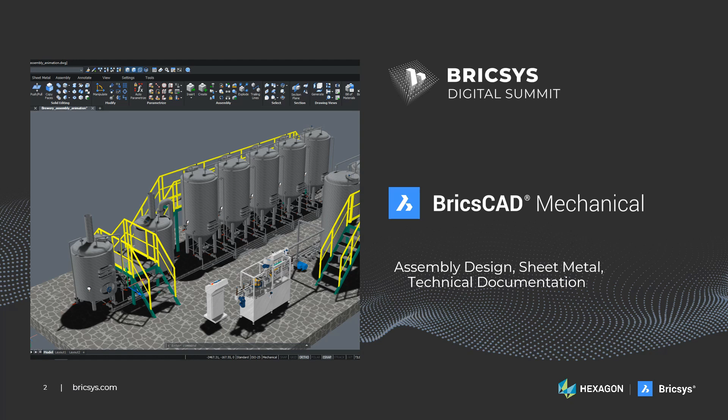If you did not hear about BricsCAD Mechanical before, then you probably consider it as just another toolset to create 2D mechanical drawings. While 2D drafting is perfectly possible with BricsCAD, we at Bricsys strongly believe in 3D. Three-dimensional modeling allows designers to fix errors at early design stages, analyze different aspects of design products, generate NC code and technical documentation. While BricsCAD Mechanical is not a toolset for 2D drafting, it is also not just another mainstream 3D mechanical CAD. There are serious differences of BricsCAD from other MCAD software.

First of all, with BricsCAD, you don't need to spend your time and money to study a completely new software with its own GUI and design principles.

With BricsCAD, you always remain in the same familiar environment, which was extended with few intuitive tools. Secondly, with BricsCAD Mechanical, you will be more productive in design thanks to our unique technology of 3D parametric components and hundreds of vertical applications from our partners. You can easily implement your own tool or application using our Lisp or BRX API.

Third, BricsCAD does not pretend to replace your current CAD system. It is ready to collaborate in multi-CAD environment. You can continue to use your different CAD tools, but with BricsCAD, you will never have headache with file formats, which lose design intent in translation. I believe no other CAD system in the world has so powerful tool set to rework imported geometry using a combination of direct editing operations with automatic history-free parameterization.

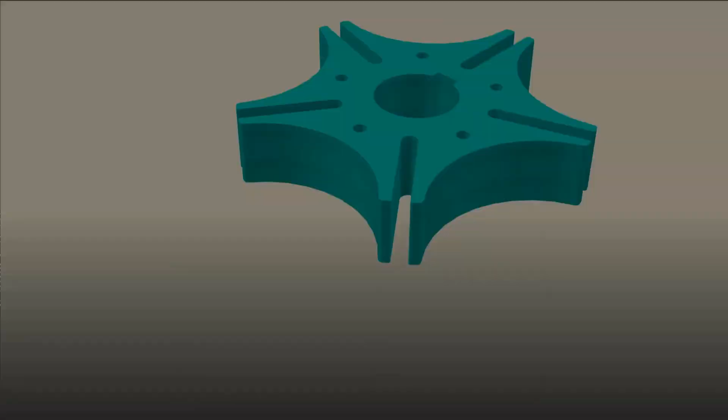Each year, our quality assurance engineers test new functions of BricsCAD Mechanical on a completely new model. This year, we were inspired by the idea of Maltese cross mechanism. This is a gear mechanism that translates a continuous rotation of the driving wheel to an intermittent rotation of the driven wheel. It was modeled in BricsCAD using 3D constraints and expressions.

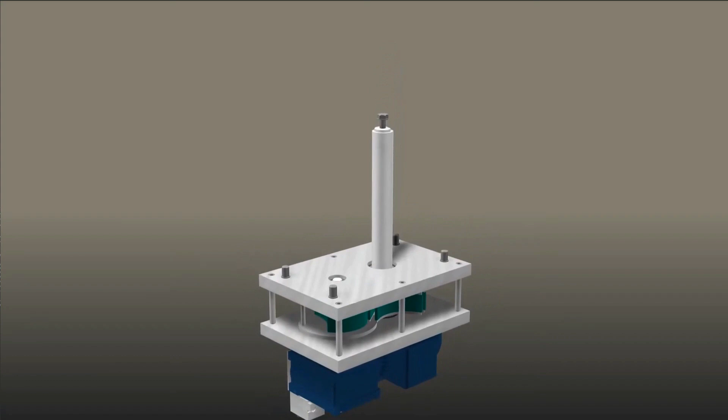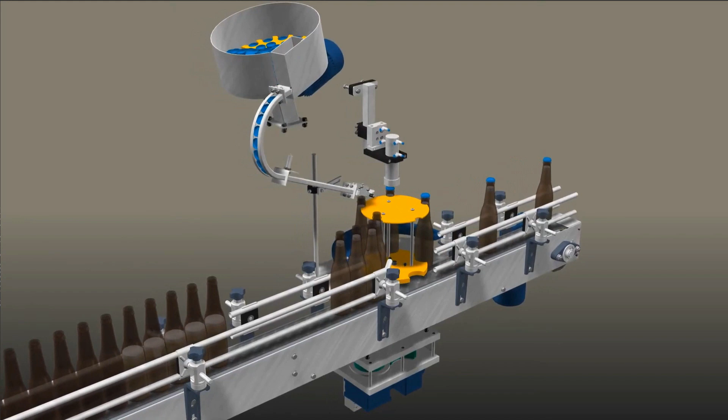And this movie was recorded in BricsCAD using Animation Editor, which allows you to create complex scenarios of 3D parametric animations with different effects, including appearance or disappearance of particular parts, kinematic simulation, and camera movement. As you can see, this Maltese cross mechanism is a sub-assembly of the filling and capping machine.

Through a conveyor, the bottles are moved under some filling valves that inject the liquid into them. After the filling, the bottles move up to the other side of the machine where a cap is provided for each of them. This model also has parameters, which allows to adapt it to bottles of different size. It is a large assembly which consists of more than 3,000 parts, of which 500 parts are unique.

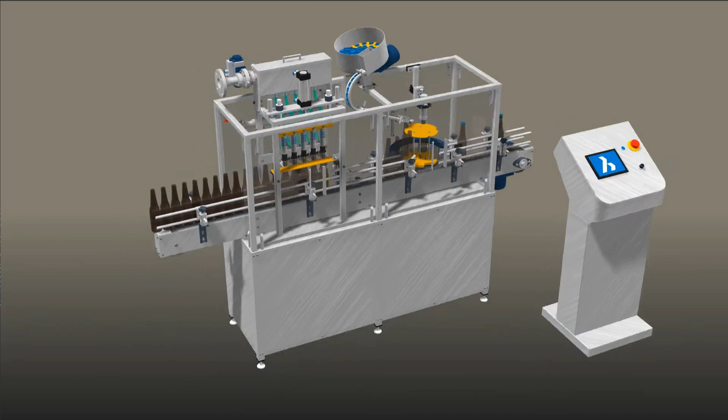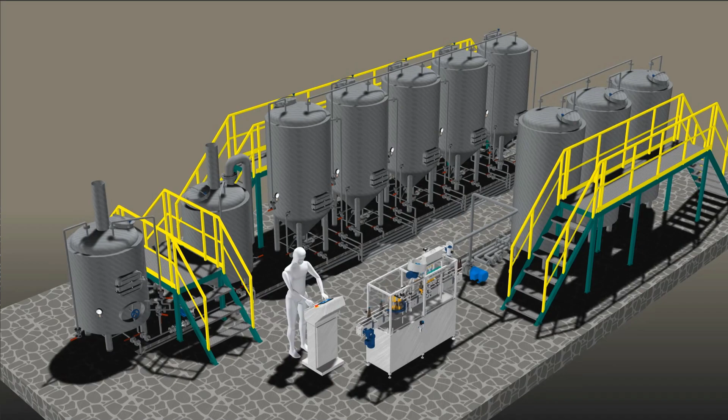And this machine is part of a brewery which also has a lot of vessels connected with pipes to a water supply and the machine. A number of standard parts are used here, which is also typical for many other industrial assemblies. This complex model was designed in BricsCAD Mechanical from scratch using new and improved tools available in version 21.

This year, we implemented the most popular suggestions of our customers and partners and extended the main tool sets, which are sheet metal design, assembly design, and technical documentation with the most requested tools. Let's take a look at these new features with the help of this brewery model. There are a significant number of very useful new features in sheet metal this year. Let us take a look at the most powerful of them using two sub-assemblies of the capping machine.

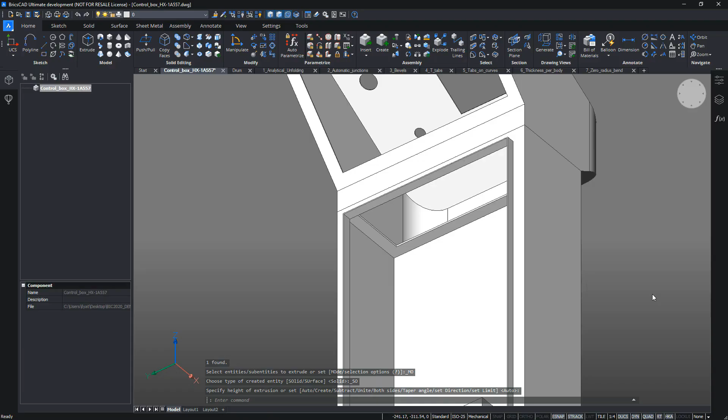In order to demonstrate the new intelligent way to create sheet metal parts from simple solids, we will be using this control box. Let's convert them to sheet metal, and now for the bottom part, you can see that on clicking on the top face, bends, junctions and reliefs are created automatically at the same time.

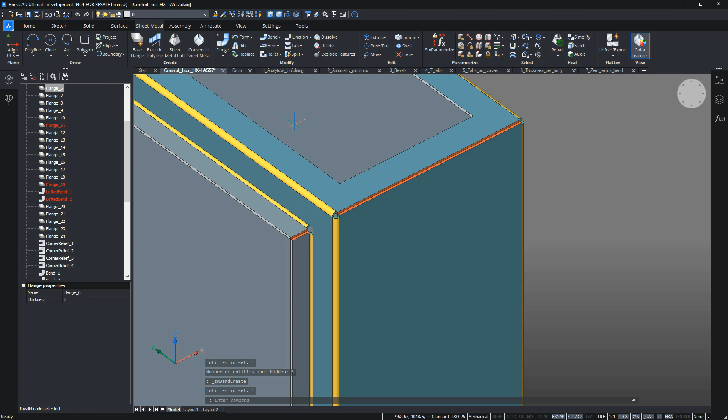That's really wonderful. For the middle part, we just click on two faces, the back and the front, and everything is being automatically created. We just have to choose the kind of miter, which is very fast using the amazing propagate capability that looks for similar geometries and automatically applies the miter. In a matter of seconds it is done and we can unfold the model. That is really amazing. Let's go now to the top part.

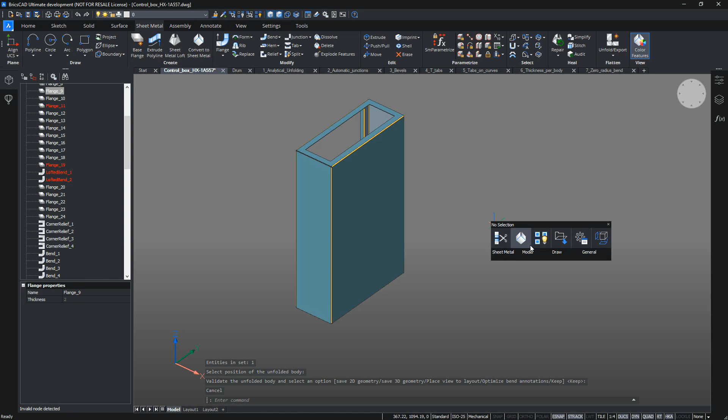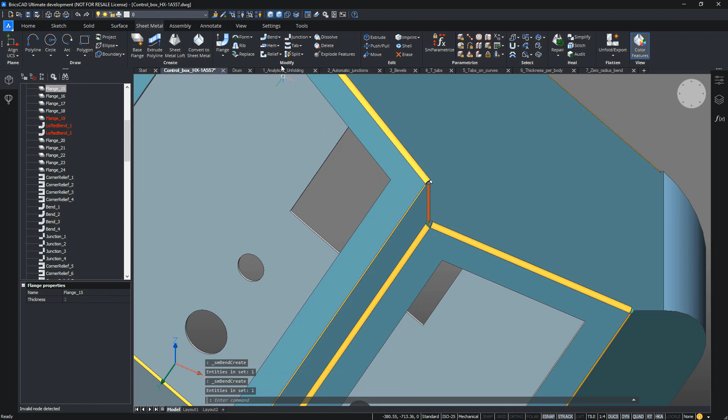First we create the bends on the top face. You can see that the related junctions are automatically being created here. Then we repeat this on the two back faces. Everything is created automatically except for the miters, which again can be placed using the propagate capability, and it's just a matter of a single click.

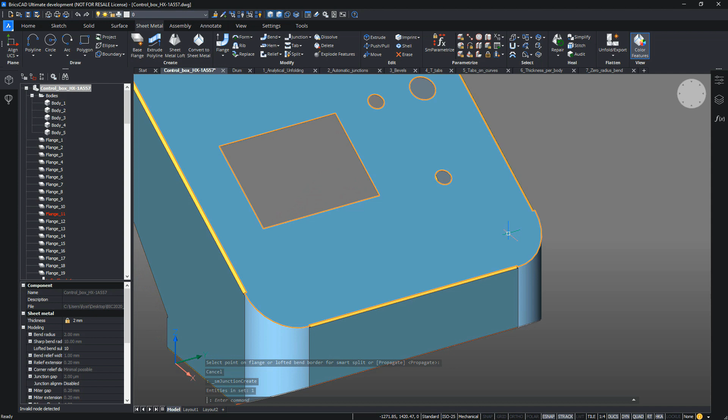Now let's try creating the curved junctions on the bottom and on the top curved edges. We will be creating the junctions here. This looks really easy. We still need to make some minor changes to unfold this part. Thanks to the possibility to switch bends and junctions, we will be swapping the bends with the junctions on the two sides. Now we will be able to unfold the part.

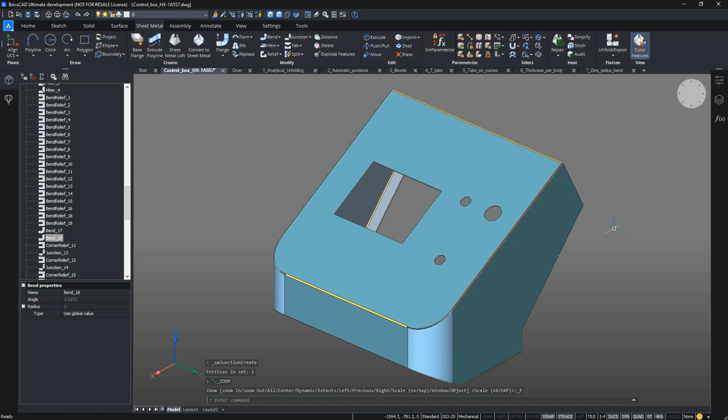Another important new capability is the possibility to assign one body with its specific properties, despite the fact that we had converted all the parts together. Here we are going to change the thickness of the bottom part. And you can see here the thickness is updated for the bottom part alone, and the rest of the components retain the original thickness.

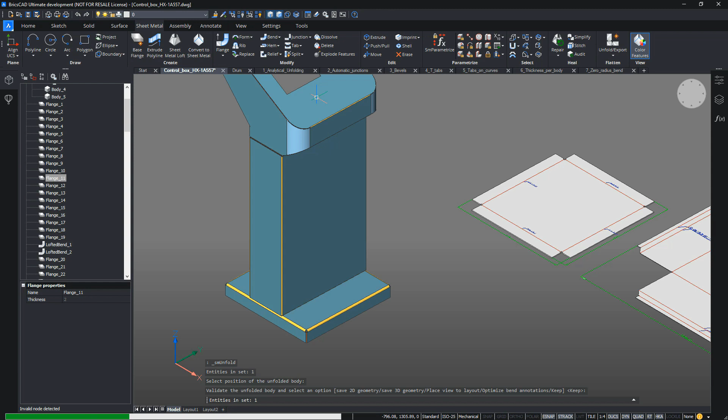And now we will go ahead and unfold all the parts. You can realize that in less than 4 minutes we have converted the three solids into sheet metal, and we have also unfolded them. That is really amazing here.

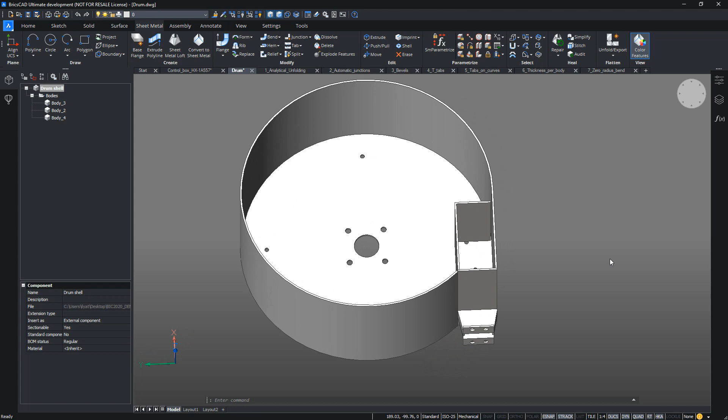Next we will be using this drum feeder that distributes the caps that will be crimped on bottles to showcase some advanced features in sheet metal. We start from the shell state, what we call poor sheet metal in BricsCAD language. First we convert them to sheet metal.

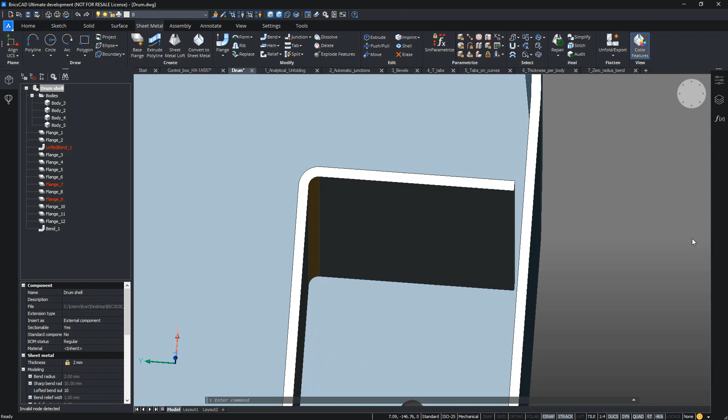Now we are going to add the bend to this small part that you see here. But you see there is a gap at the flange end. Now we will be filling this gap using the sheet metal junction. Then with our new T-tabs function, we can switch this junction to tabs and slots inside the flange, and not only at the corner. Look at this result here, that's really amazing.

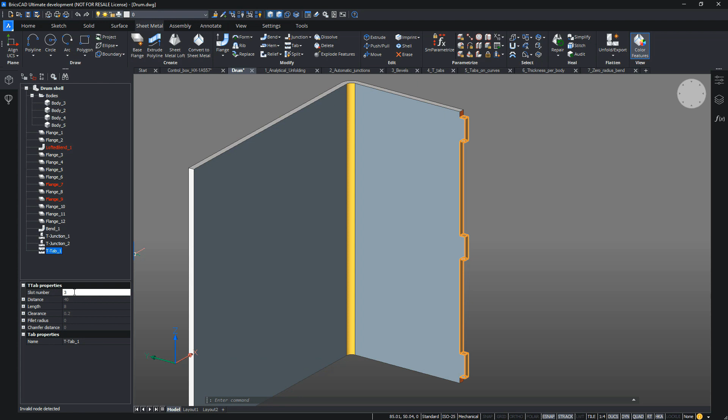But this is editable. We can change any parameter. For example, we can change the number of tabs to 2, and it is going to still retain the symmetrical feature. Now we will add two small flanges to guarantee the perpendicularity, and let's try to fix the width to maintain the design intent.

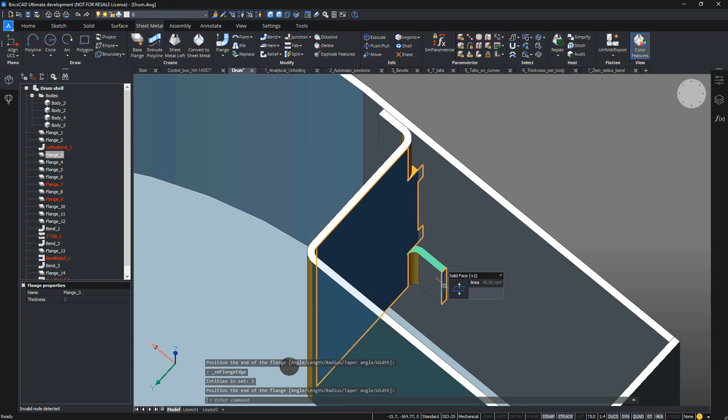Let us see how the tabs are going to behave when we try to move them by moving the flange using the push-pull command. The tabs and slots are going to move accordingly, and the design intent is being maintained. Even when we try to rotate the flange, the tabs and slots are going to move correctly.

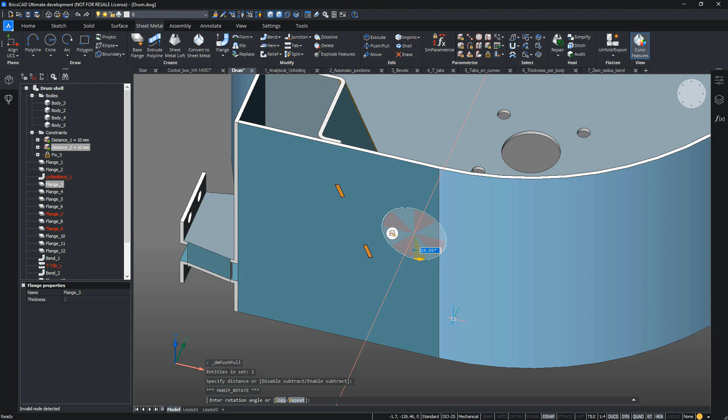Then thanks to the new capability of BricsCAD 21, we can change the thickness of this part, and you can see that the tabs and slots are actually changed, and the design intent is also respected. And you can see there is no collision here. And of course, we can unfold this as well.

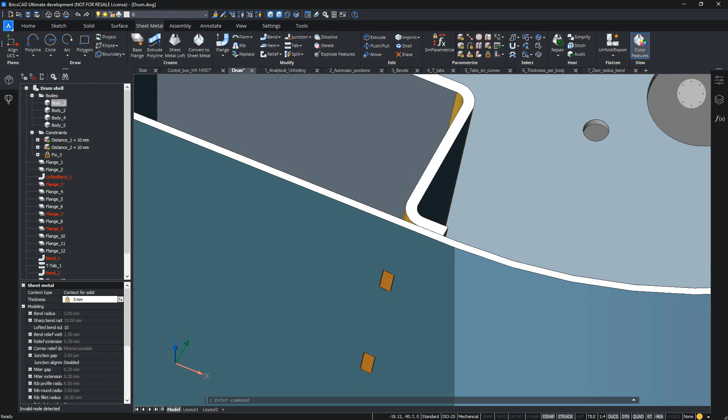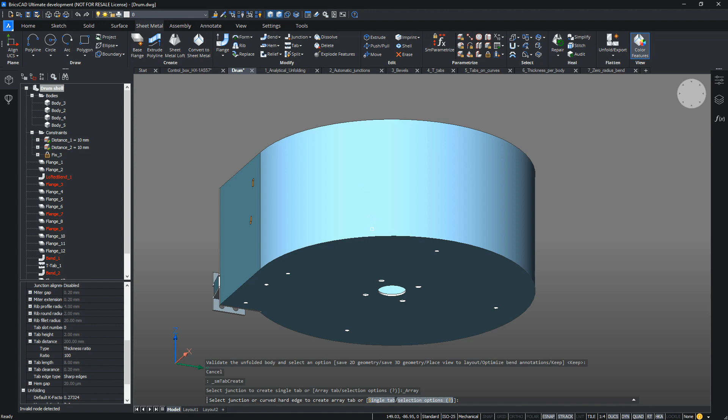Things get even better with this next capability. What about tabs on curves? First, let's set the number of tabs to 0. It means that the number will be chosen automatically according to the distance that is being selected. Now just click on the round edge and let's see the miracle. We are going to get the tabs with the perfect distribution.

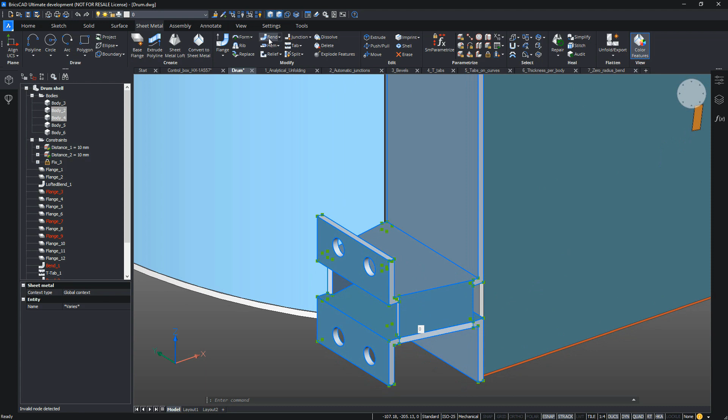Of course, we must create a junction to separate the parts, and let's do that here. And now to finish, just select the remaining parts in the rectangle and click on create bend. These solids are now fully converted to components which can be successfully unfolded.

Finally, we can go ahead and unfold all the parts. If needed, these drawings can be exported to DXF file format as well. All these features will help us to save a ton of time during the design process.

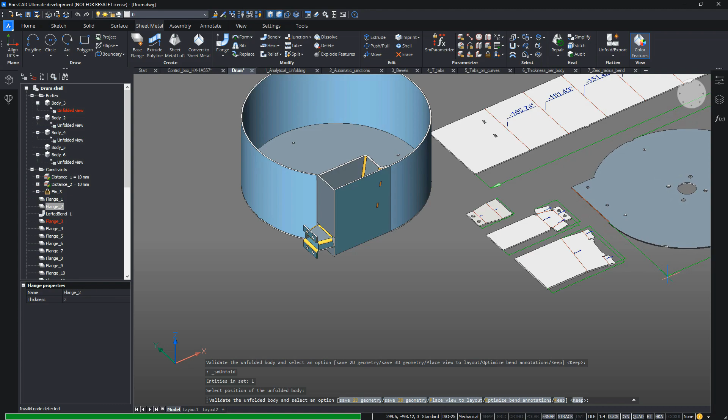But there is one more kind of part which is also very typical in mechanical engineering. These are seamless and welded pipes, elbows, tees, crosses, reducers and flanges, also called pipe fittings. They are widely used in machinery, automotive, aviation industries and also in oil and gas.

In BricsCAD V21, we added a rich set of such parts of the most popular standards. We also streamlined the way to insert and connect them. The bottom-up design was never so easy, and we keep the freedom of direct editing in combination with full parametric control. Let's see this in action.

I want to show you some cool new features and tools which we have prepared for piping design. Let's go ahead and showcase this with the brewery model, which was created from scratch in BricsCAD. As you can see, this model contains around 800 parts and more than 1000 constraints between them.

All these constraints were added automatically during the new mode of the BMINSERT command, which is called smart insert. Let's check that even with such a big number of constraints, this model is workable. For example, to have access to the vessels, we need to add a platform between them.

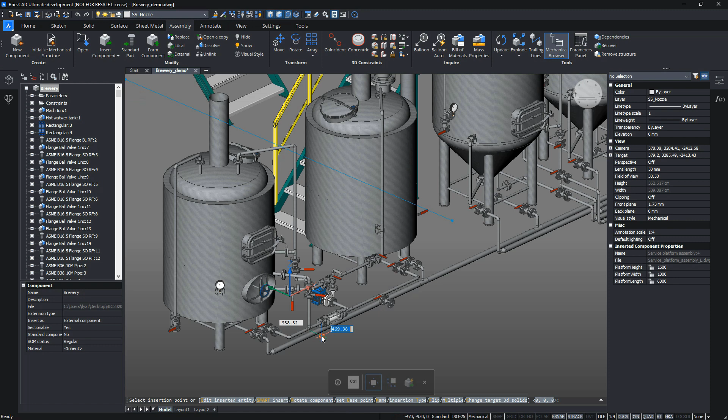The original platform looks very big, but fortunately it is parametric, so you can easily change its dimensions to adapt to the actual situation. Here we need to change the height and the length. As you can see now, we have a problem. There are a few intersections between the inserted platform and the existing pipe layout.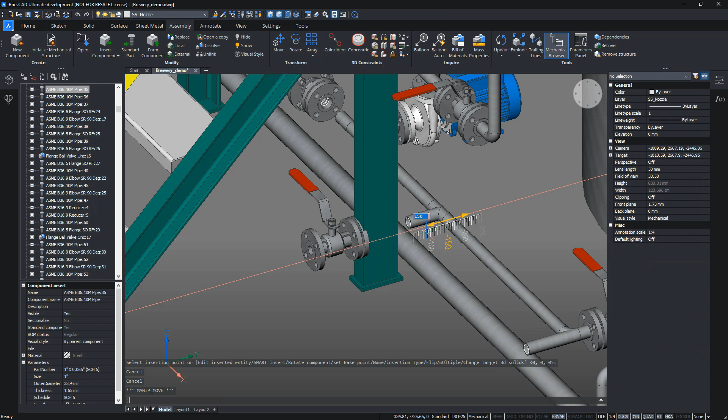For example, the placement or the pipe lengths will adapt automatically. So we need to move just one pipe and the whole line will move properly. There is still an intersection with the valve, so let's move it also.

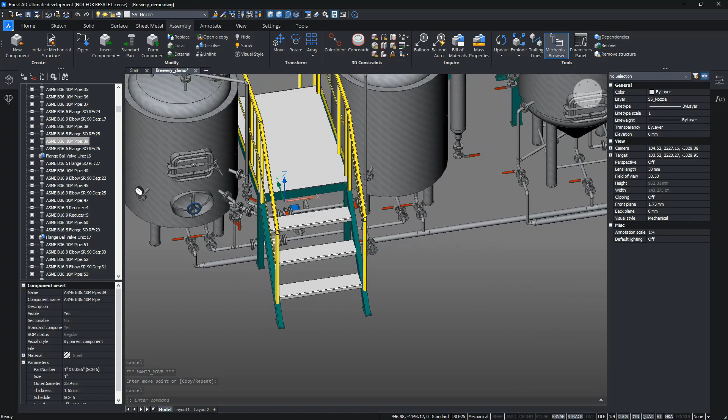Since our brewery has become bigger and bigger, workers will not have time to do everything manually. So we want to upgrade it by adding some automation, for example, by adding the filling line here. I think you remember this filling line. In the sheet metal demo, we had used this filling line. Here is our filling line and now it looks like everything is ready for connection.

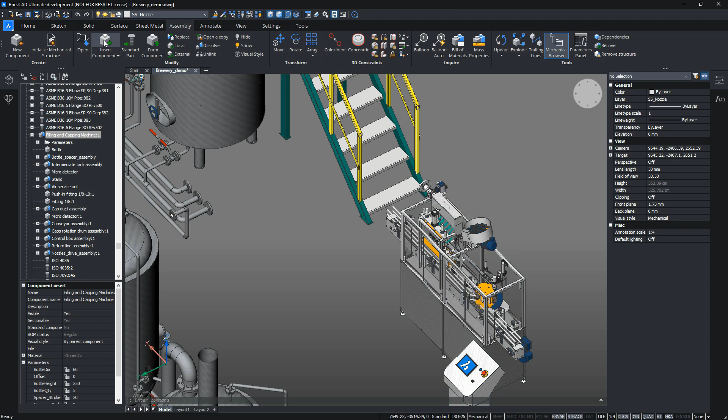But we cannot directly connect the filling line with the layout. We need to add a pump. This pump will transfer the beer between the filling line and the vessels. We do not want to place the pump in front of the required flange because it will block the passage. So what we actually need is to place the pump behind the flange, but it again will cause some modification of the existing layout for proper connection.

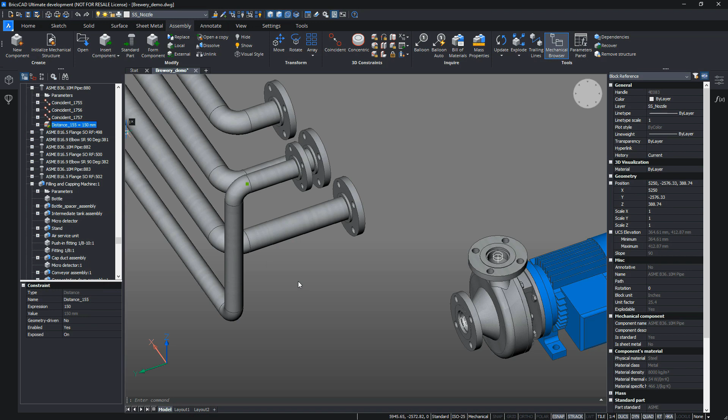So first we rotate the elbow with the flange. It can be done by any rotation command or just by manipulator. Such operations will preserve all required constraints, so the layout can still be modified properly. Then we need to connect the flange to the pump. We can just directly move it there or use the BM connect command, which was implemented to connect two components which have information about how they should be connected.

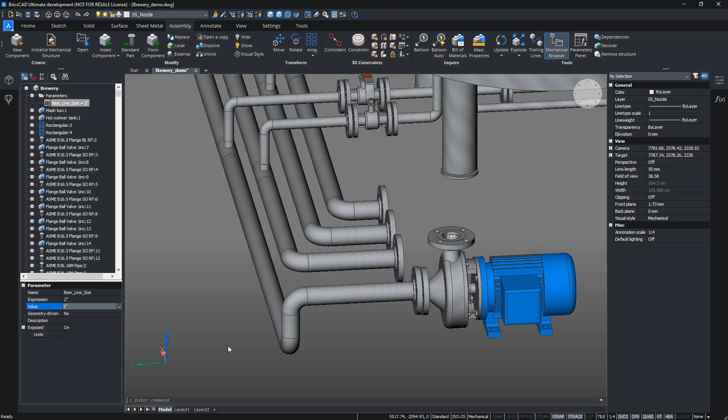As you can see, the outer diameter of the existing layout does not correspond to the pump diameter. But again, we have properly parameterized the layout, so we can adapt the diameter by just changing one parameter. So the flange, the adjacent pipe and all the other connected pipes and T's will change their diameter properly.

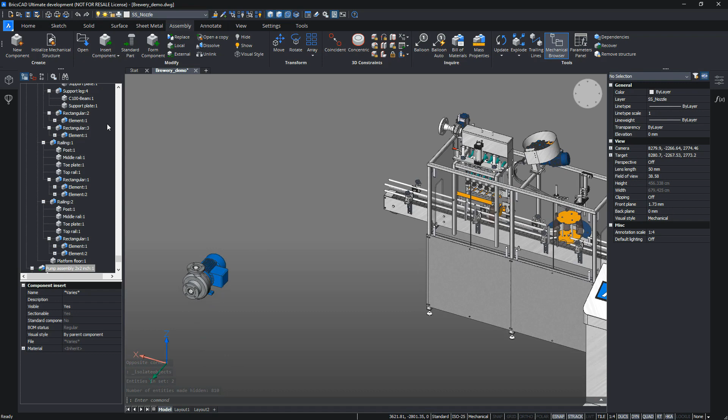Let's continue. Now we want to connect the pump to the filling line. We can do it easily with the help of a new standard parts library and a new option of the BM insert command called smart insert. The standard parts library has been reconfigured to improve usability. All existing parts are separated into three categories: fasteners, machine parts, and structural shapes.

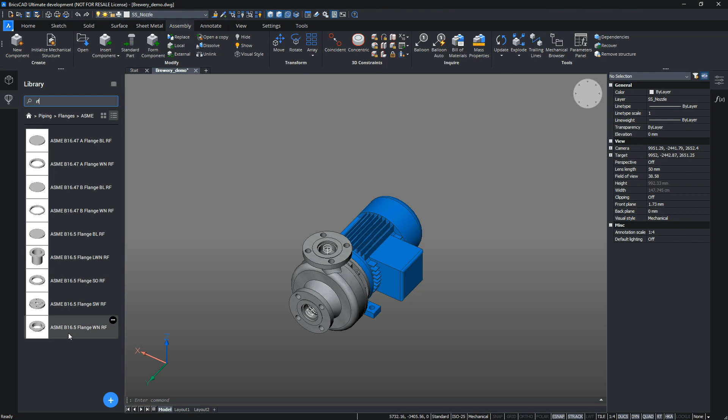The piping category with 182 new parts has also been added. Mostly it contains parts from the American standard, the German standard, and also the international standard, which is ISO. Currently, the piping category includes parts like pipes, fittings like elbows, returns, reducers and eccentric reducers, T's and crosses, a lot of different flanges as well, and finally, gaskets.

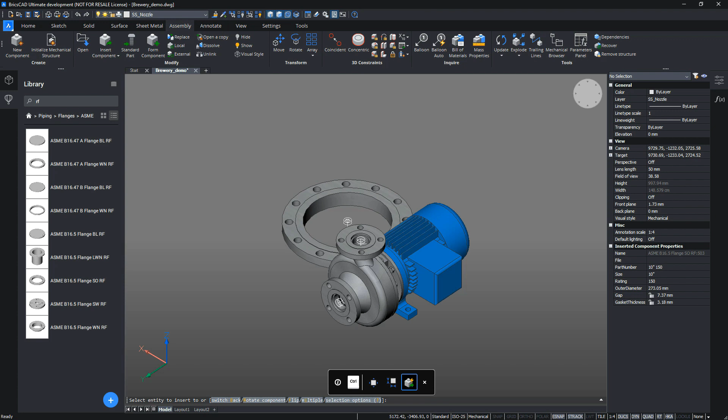So if we drag a piping part from the library, by default, the Smart Insert mode of the BMInsert command will be used. This mode can be used on components which store information inside about how these components should be connected to each other. This information is stored as a point and line on special layers with the postfix connection. These entities represent the connection point and the connection direction.

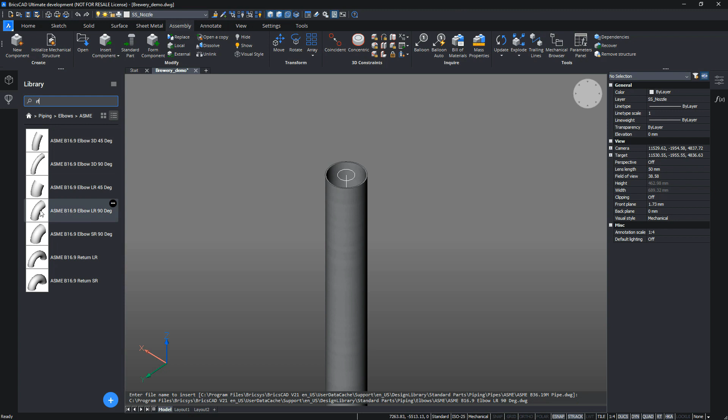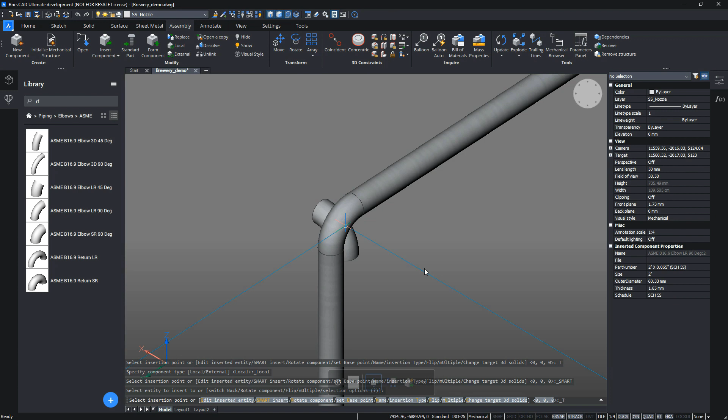Also, this mode recognizes which parameters of the base component can be used in the inserted component and tries to copy values or expressions of such parameters. This allows the inserted part to adapt to the base one and also allows creating a parameterized layout. One more thing which allows creating a parameterized layout is proper constraining. So Smart Insert analyzes the inserted and base parts and decides which constraints should be added to them to allow correct further work.

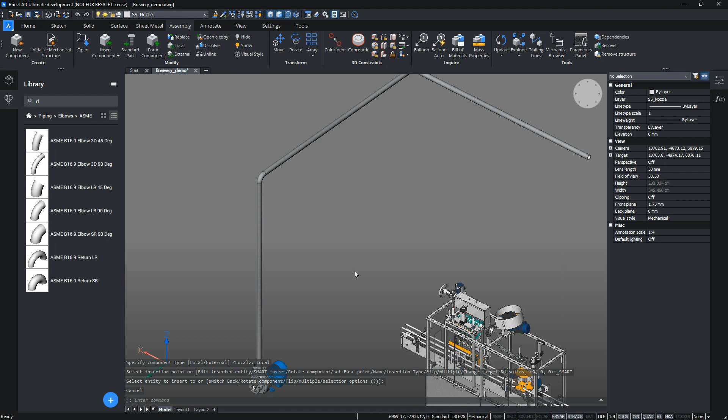We continue with the creation. As you can see, when you hover the inserted part over the base one, its size is being changed. It will properly connect to the base one. Moving and rotating such parts is still available and does not spoil the parameterization.

Moreover, because of constraints, adjacent elements are adapting to the move. Smart Insert can be used not only from the library but also on already inserted components.

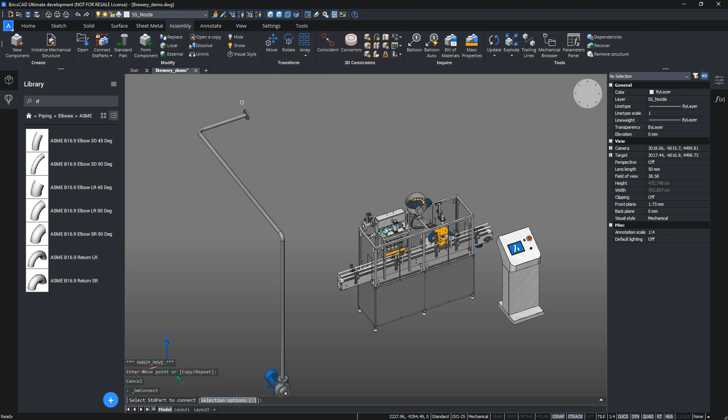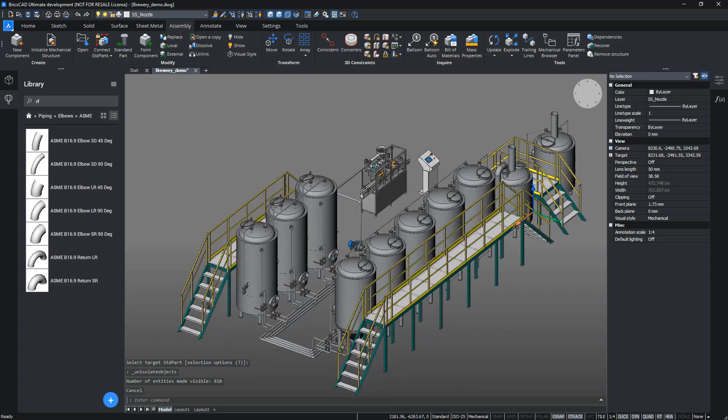As a final step, we need to connect the created pipes to the filling line. We could use the move command again, but we need to position everything correctly. Instead, we can use the specialized BMConnect command, which does it automatically. You only need to point out which two components should be connected to each other. Using BricsCAD 21, it's possible to create parameterized pipe layouts which can be easily changed if needed.

We just saw that assembling large parametric pipe systems in BricsCAD Mechanical is as simple as connecting Lego parts together. But to manufacture these assemblies, one has to properly generate the corresponding technical documentation as well. Let's see how to solve this task with BricsCAD Mechanical.

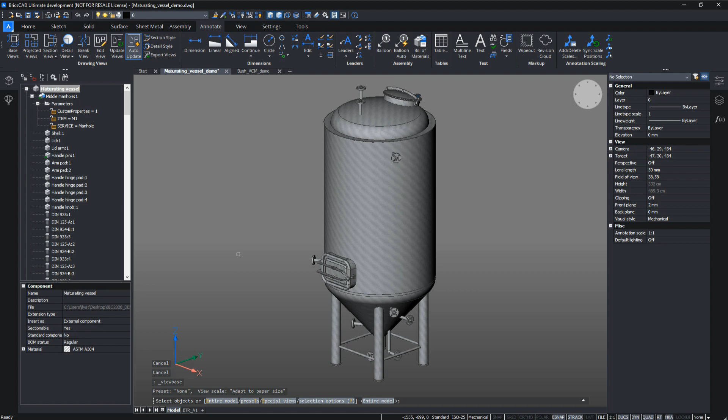In V21, we implemented new powerful tools to create associative two-dimensional drawing views from 3D models of mechanical parts and assemblies. Let me demonstrate these tools using the example of the beer vessel.

According to the standard, the main view for the vessel is the section view. To achieve this, first we create the base views on the layout, then create the section of the side view. We can also create the top and bottom view. These can be annotated later on.

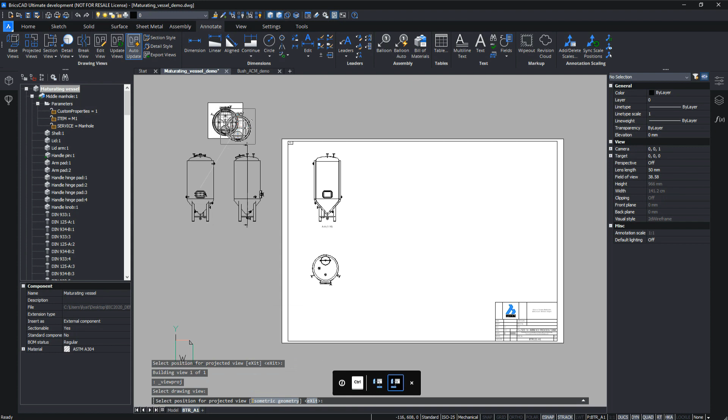The next parts of the vessel are the most important - they are responsible for preserving the contents of the vessel. The middle manhole sub-assembly does not completely fit into our drawing, but we can easily change its scale using the command option, which allows easy customization during view creation.

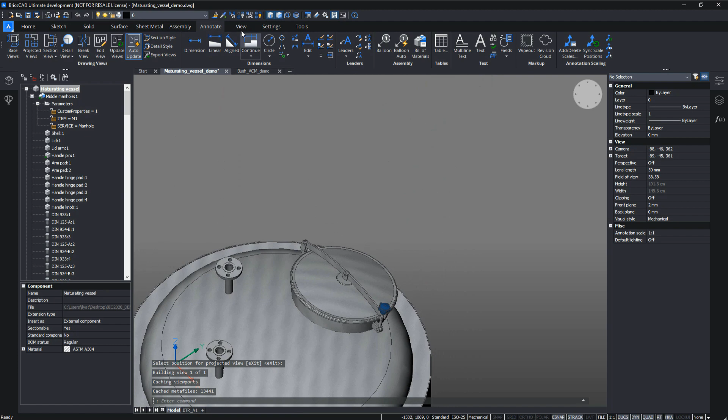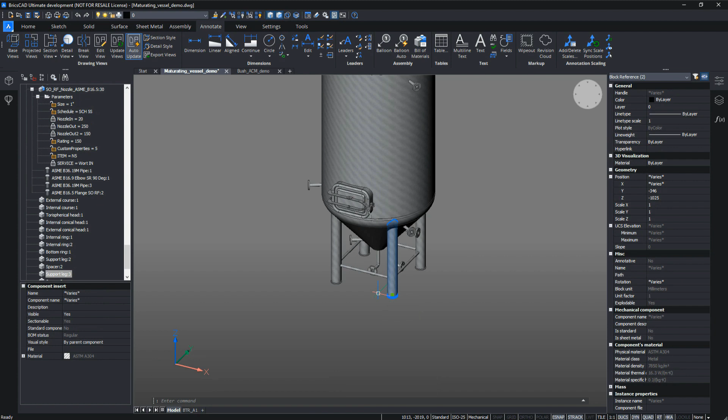The next step is not so obvious and could take some time because the sub-assembly orientation is not known - it is not aligned with the coordinate axis. That's why, to create the correct view for the top manhole, we use the View Base command with the current orientation option. This option inherits the camera position from the model space and uses it in the drawing view, allowing us to create the custom view quickly and easily.

The space on a layout is limited. We also plan to add annotation tables and technical notes in the future. In V21, we introduced the new Break View command that can reduce the drawing view area by hiding fragments.

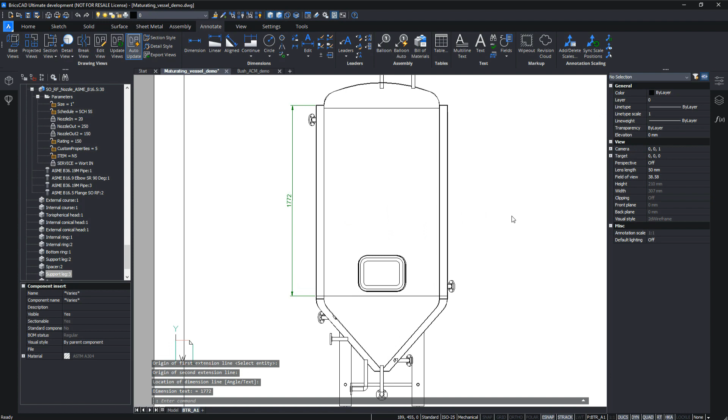Let's create a vertical dimension and check how it behaves with the break view. Now you see the vertical dimension keeps the correct value after the break operation.

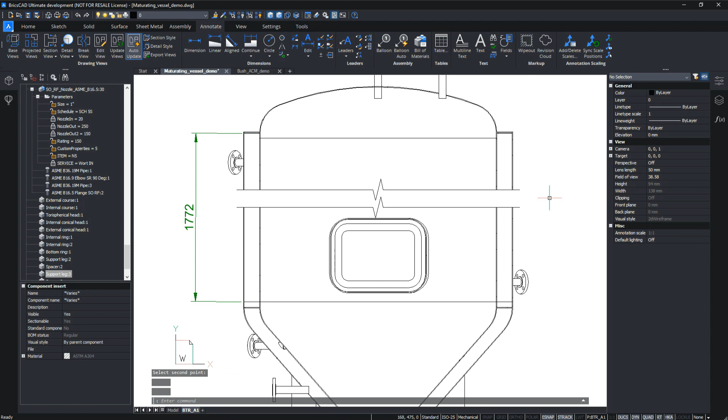The break symbol has several properties. You can change the type of the symbol - for example, from spline to zigzag. Other parameters, such as distance between the curves, can also be changed. We support vertical and horizontal cuts and can combine both on one view.

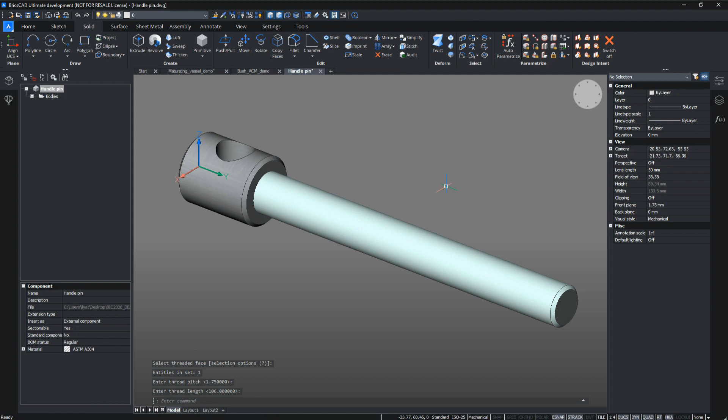Fixation of the manhole door is achieved by using a threaded pin and knob. We've implemented the new DM Thread command, which allows us to create a decorative thread to display on the drawing view. Let's open the pin component and add the thread. Using the new tool, we can easily create the thread on any cylindrical face. You can configure the pitch, the length, and the diameter of the thread.

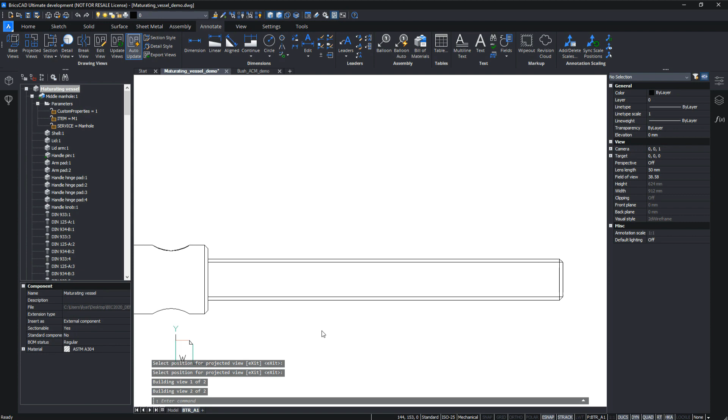Let's switch to the main assembly and create a drawing view of the pin. You can see that the threaded model displays correctly in the drawing views. We've put all the necessary views on the drawing - it will be finished later.

Now I propose to switch to another drawing, a very special one. Our project partners helped us with a couple of drawings, but they preferred to work in an old-style manner using AutoCAD Mechanical. Unfortunately, after receiving the drawings, we noticed several mistakes that must be corrected.

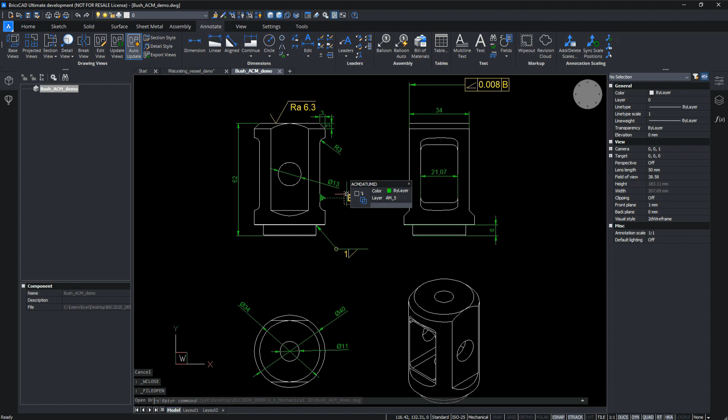By default, when you open an AutoCAD Mechanical drawing, some specific symbols are represented as proxy objects. To be able to apply changes to these objects, you need to activate the Mechanical 2D Enabler, like we've just done, and reopen the file. After that, you can modify the 2D elements.

We support copy, move, erase, and other basic operations, but our capabilities are even wider. For example, you can see here the datum ID being copied using the manipulator.

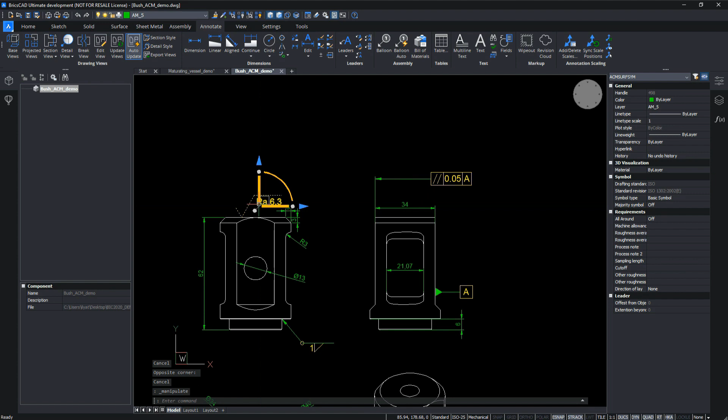In V21, we added the ability to change the properties for 2D elements from the property panel. We've corrected the feature control frame properties and are now replacing the surface finish symbol.

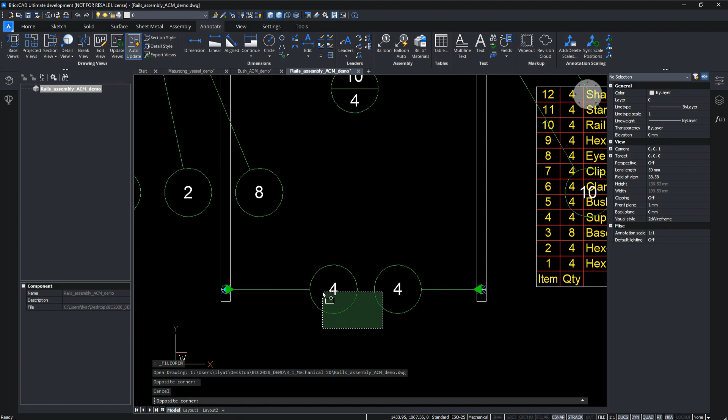Another example illustrates the assembly drawing. It allows us to demonstrate the ability to change the balloon properties, such as the balloon type. You can change it from circular to polygonal, and the arrowhead style. In our case, we use a standard arrow.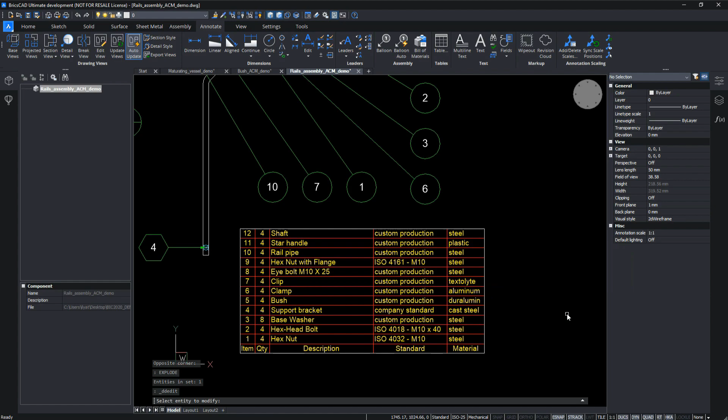We see that the part list overlaps with other balloons, so we have to correct this mistake and at the same time edit the support bracket material. All these manipulations will take us just a few seconds, and we did not ask the author of this document for any help. The next step in documentation in most mechanical drawings are tables.

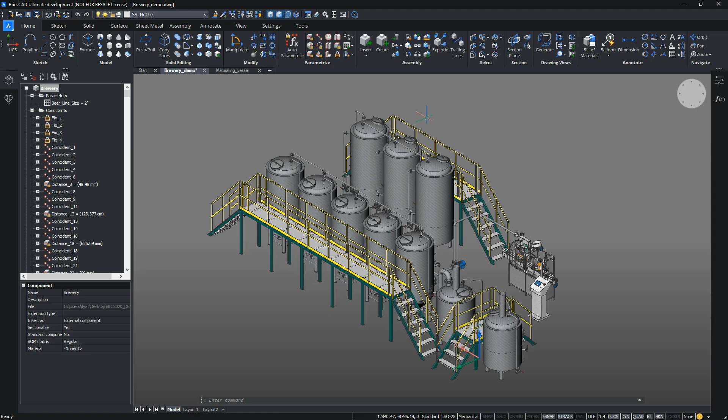It can be a trivial part list or something more sophisticated. The Bill of Material Manager of BricsCAD Mechanical allows you to create many kinds of such tables, and since V21, its capabilities became absolutely fantastic. I'm going to show you the most interesting features of Bill of Materials in BricsCAD V21.

Let's start with this brewery model. With more than 3000 parts here, you will need a fast, flexible and powerful tool to document and analyze. Good news is that the Bill of Material in BricsCAD does exactly that.

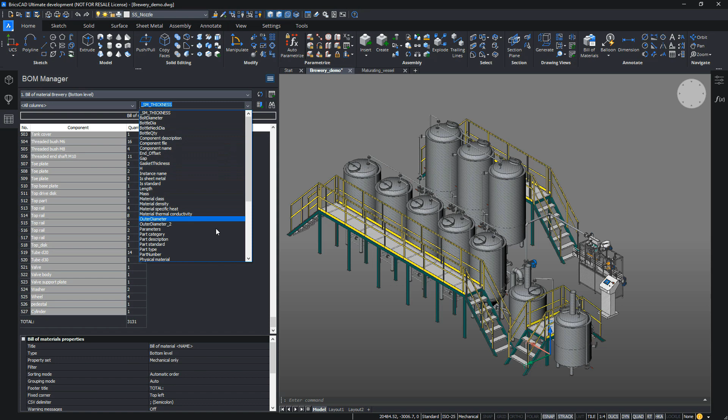For example, what if you want to see only the parts related to pipes, which this model has a lot of? To list only the parts related to the pipes, we will add the part category column and use a new feature of BricsCAD V21 called column filters.

Column filters allow you to quickly set criteria to show the rows which we need, similarly to spreadsheet processors. Here, we use the filter to select only the part categories related to pipes, such as elbows, flanges, pipes, reducers and tees. This table now shows all the parts related to the pipes.

But what if you want to know the total length of the pipe by size? To find out, we copy this table and adjust the filter to show only the pipes. Next, we remove the component column and add the size and length properties.

Normally, BricsCAD groups parts with respect to their components. In order to group pipes by their size only, we need to change the grouping mode to by columns only. In this mode, parts will be grouped only by the added columns, which is exactly what we need.

To get the total length for each pipe size, we use another new feature called the aggregate function. Similar to footers, they can also compute the sum, average, minimal or maximum value in the group. And you can still add them to the footer.

Additionally, you can also set a column filter to find a specific range. Let's say in this particular project, I want to see only pipes between 50 and 100 meters long. This can be easily done using the aggregate function. The aggregate function and the column filters form a quite powerful tool, and we hope you liked it.

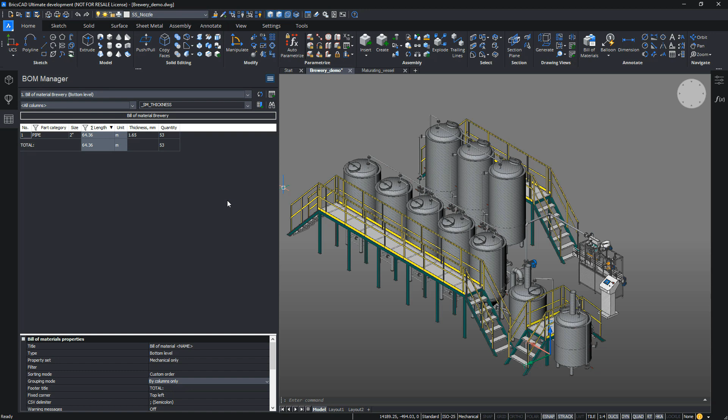Now, let me switch to a familiar drawing of the maturating vessel. It's almost ready now, and all we need to do is add some specifications and annotations. Let's start with the material list. First, we create a bottom level bill of material and rename all columns to meet the company's standard.

For pressure vessels, materials and dimensions for each part are also required. So we add the necessary columns, such as the physical material, the part category, the part number, and the length. However, we want dimensions to be in one single column.

So we create a template column from the selected ones. It's a new feature to combine several properties in one cell. It's based on so-called diesel expressions, so even quite complex templates with conditions are possible.

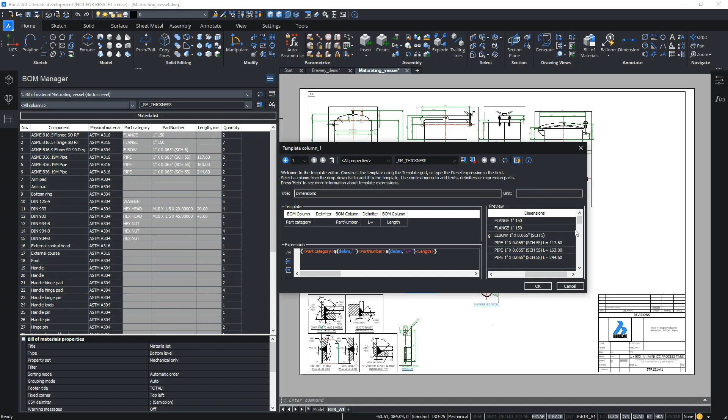BricsCAD automatically adds delimiters between values, which you can adjust with your own text. Of course, you can configure template columns as you want using this template configurator dialog. Now all we need to do is remove no longer necessary columns and add the table to the drawing. And now it's done. Isn't it impressive?

Of course, we've highlighted only the most spectacular new features of the bill of material, but there are more. Please try them using BricsCAD V21.